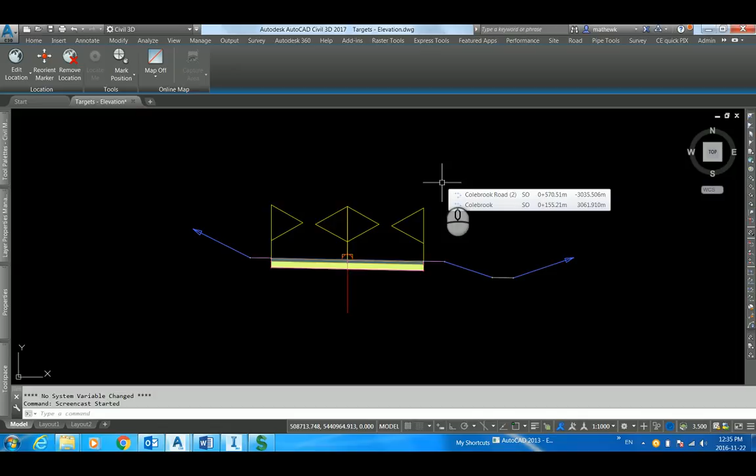This is the third in a three-part series on corridor targets. In today's episode, we'll discuss elevation targets. In this case, our assembly contains a ditch created from such subassemblies as the generic links. In a general case, this ditch is 750 millimeters deep from the hinge point. And generally that's the ditch design that we're happy with.

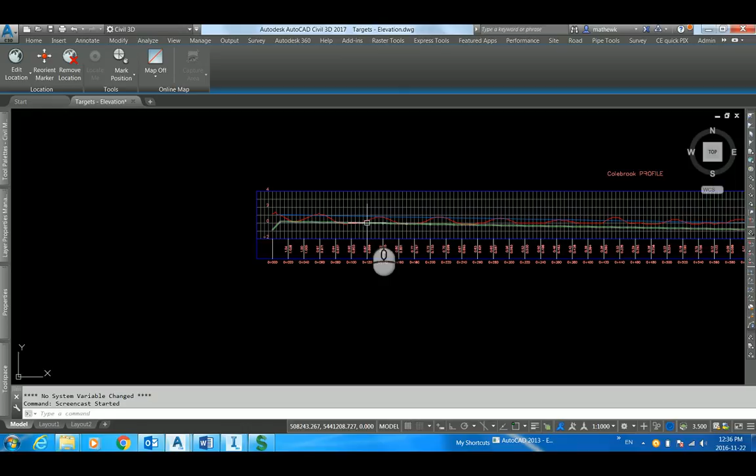But in our case, the profile design dictates that in some cases the ditch must be deeper. The blue line is the design centerline profile. The green line is the design ditch profile. The red line is existing ground. In this section, in this station range, the ditch is still 750 millimeters deep, a standard offset from the hinge.

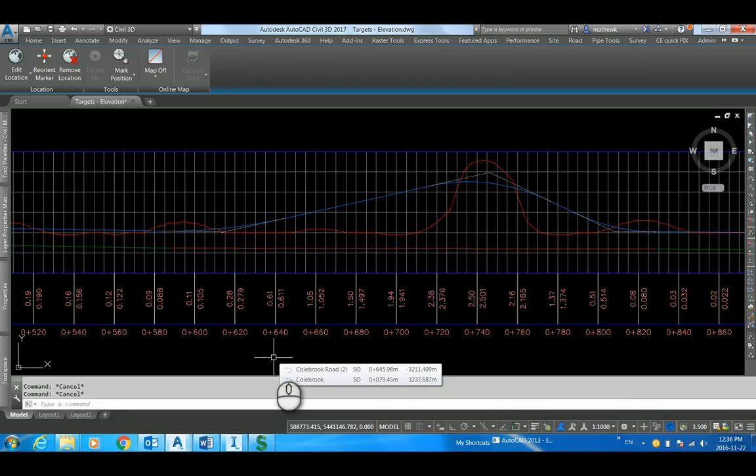Later on in the design, the road must tie into an existing trail. Thus, our road centerline goes up and then back down again. Since we want to maintain positive drainage the entire length of the road, we must design a ditch profile in this location. Here it's virtually flat, but that's okay for our design. In this case, we will link this design profile with the associated subassembly.

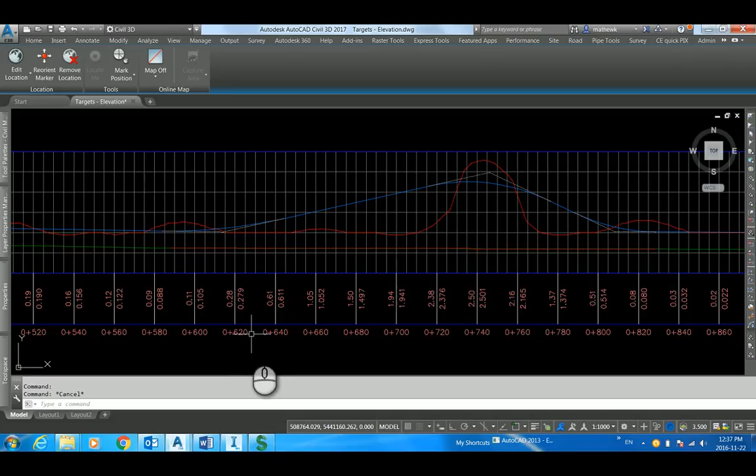First, we have to determine if the subassembly that is in use is compatible with this design intent. Here's the help file for the subassembly I'm currently using: link, slope, and vertical deflection. If we take a look at the target parameters, we can see that the vertical deflection can be overridden by a profile or a 3D polyline or feature line or survey figure. So yes, this subassembly is compatible with this design intent.

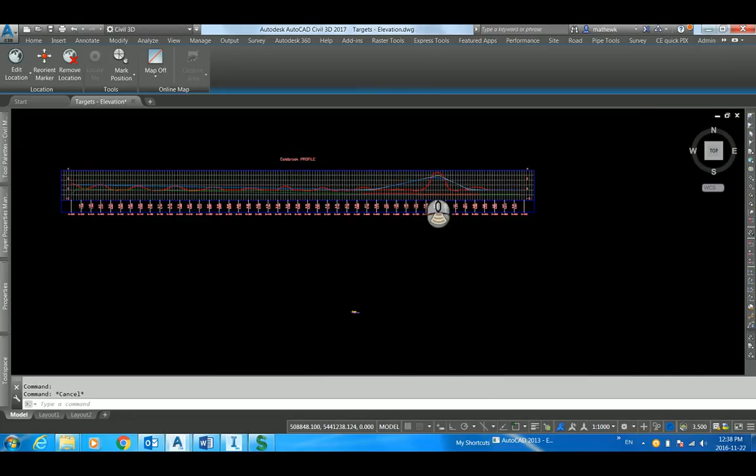How is this done? Here's our corridor. I'll specify targets for this region. Under the slope or elevation target section, here's my subassembly. I've renamed it, I've called it ditch in. I'll apply, in this case, a profile. I'll apply a profile of the Colebrook Road ditch to this subassembly.

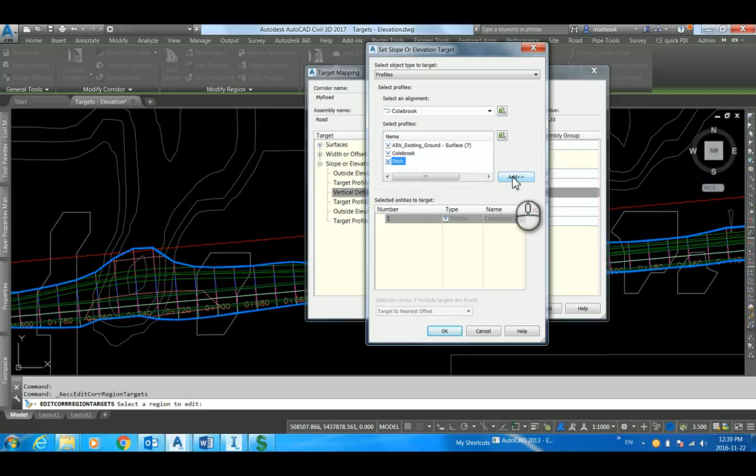Once the corridor rebuilds itself, the ditch behaves as intended. For example, in this section, the ditch is still 750 millimeters below the hinge. In this section, you can see the foreslope getting wider. It maintains 3:1 slope, but as it gets wider, of course, the ditch gets deeper.